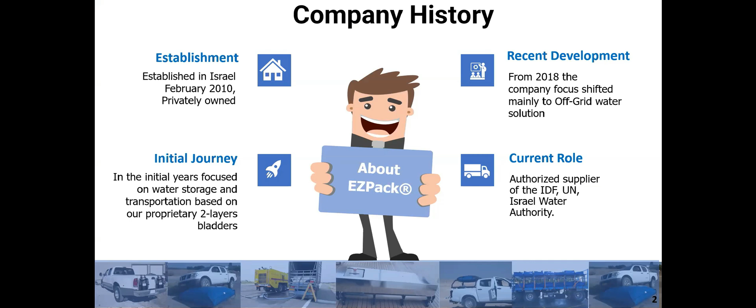And then in the last years, we are focusing on a solution for off-grid clean water for drinking and for agriculture, especially in light of the major water problems there are all around the world. We are also a supplier of the United Nations, Israel Defense Forces, Israel Water Authorities, and we have clients, of course, in Israel, and in the United States and several other countries.

So water is a huge issue. Currently, almost 800 million people all over the world, mainly in undeveloped countries, don't have even basic drinking water services. It's expected that in 2025, about 50% of the world population will be in areas that will be water stress areas.

Even in the United States, when we're speaking of the West Coast, there is a huge issue of water for agriculture because of the drought that continues for years there. And last summer, they significantly cut the water allocation for farmers on the West Coast, and farms have been closed because of no water resources.

All our products are based on one major concept that we developed, which is a two-layer bladder. A bladder is a flexible water storage container used all over the world in many cases. The main problem with bladders, which are one layer, is that it's a one-time product. Once you finish using it, you can't clean it and restore it to drinking water regulation standards. So you have to throw it away and use a new one, and that's of course a cost issue.

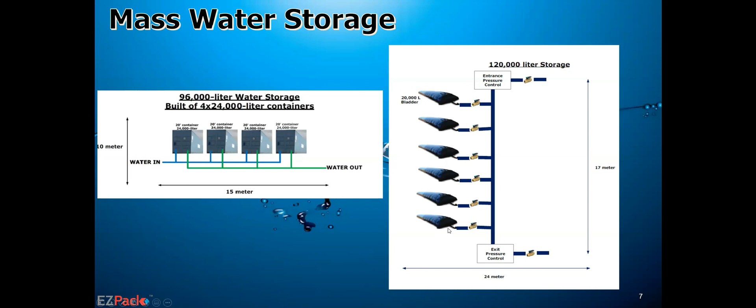Or if there is a problem, again, you deal with the bladder that is in a problem, and the rest of the storage is working. We have several very unique water transportation solutions, basically to replace tankers. The problem with a tanker is it's very expensive equipment, several hundreds of thousands of dollars, and usually people buy it for average use. The problem is when you have a peak need for transporting large amounts of water, of course you don't have enough tankers, and we came up with a solution to this.

What you see here is a solution we call the Spider, which is a mobile water unit. Basically it can be fitted on any vehicle. We just need to know the dimensions and the weight limitation of the vehicle, and we design the Spider according to it. You can see here some examples. This is a standard trailer of the US military with an 800-liter Spider. This is a military truck with a 2,000-liter Spider, and this is a standard pickup with a 500-liter Spider.

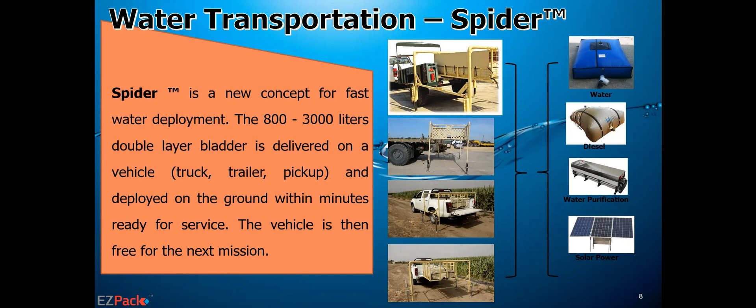We can put water storage on the Spider, of course. We can put diesel and have the Spider be a mobile diesel station, and we can put our water purification system, which I'll talk about in a minute, with solar power and provide a mobile water purification unit.

For large water transportation, as a replacement for tankers, we have two solutions. The idea is basically to use equipment that is available everywhere. In this solution, which is the HipoKit, we are using a standard flatbed truck. It can be a 4-meter truck, it can be an 18-wheeler. We built a kit that you put on the flatbed truck in a very short time, and you have a tanker at a fraction of the cost of a regular tanker. And when you finish using it, you can disassemble it, and the truck can be used for other uses.

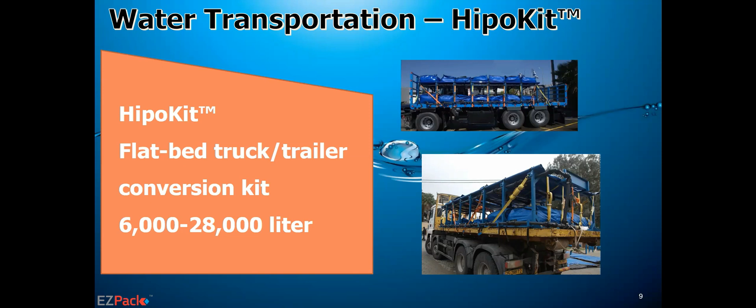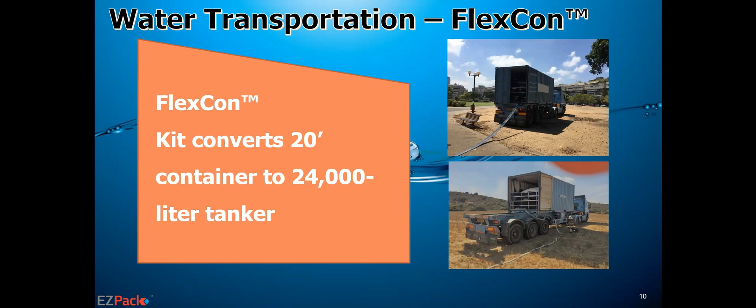The numbers are: a 4-meter truck can take 6,000 liters. An 18-wheeler can take 28,000 liters, and in between depends on the size of the truck or the trailer. And then we have another solution based on a standard 20-foot container, where again, we put the kit inside the container without making any changes to the container itself. So you can rent a container, use it with the kit whenever you need, and then disassemble the kit and reuse the container for other things. Such a container can take 24,000 liters.

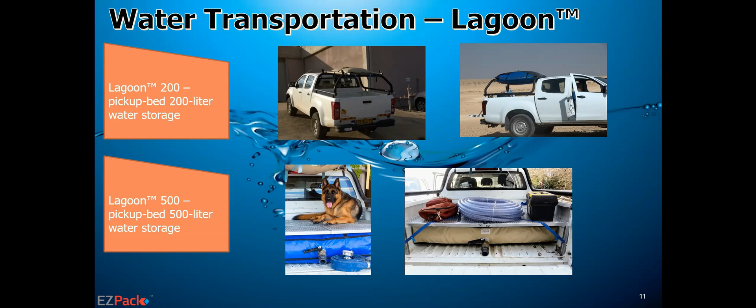And then we have some solutions for what we call tactical vehicles, mainly pickups, that can take water storage for rangers, first responders, and those kinds of things. Potential use cases for this equipment are, first of all, refugee camps. In refugee camps there is always a water problem, and we can provide a very fast water distribution solution to a very large refugee camp.

Of course, disasters: every time there is a disaster, and it doesn't matter if it's a flood, hurricane, tsunami, or tornado, the first thing that needs to be taken care of is the water utility, the water system. Even if the water system is working, usually the water is contaminated and needs to be treated, and people can't live a long time without water, contrary to food. So water needs to be supplied very quickly, and we provide those solutions.

And then, of course, we have the militaries, where again, for deployment and those kinds of things, we can provide very good solutions. And in the last year, in light of the major issue of wildfires around the world, we have also developed solutions for what we call pushing water to firefighters, because fire trucks have a limited amount of water storage. So we provide water forward to the fire line, so the fire trucks don't have to travel a long distance in order to be filled. And we also have a solution for refilling firefighting helicopters on the fire site. So that's the first part of our products, which are water distribution, transportation, and storage systems for various situations.

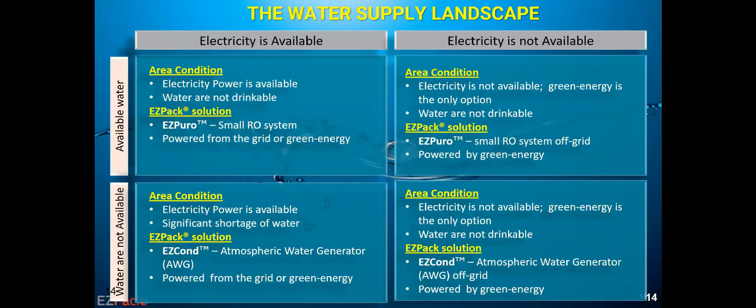So our treatment system is based on reverse osmosis, a very well accepted technology, which can do purification and desalination. We can purify water from wells that are contaminated, rivers that are contaminated, or we can desalinate brackish water and even seawater.

The most important thing about our products is that they are aimed for local solutions. So they are compact, they're small, they are easy to install, and don't require a lot of energy. So the solar system that supports them is relatively small.

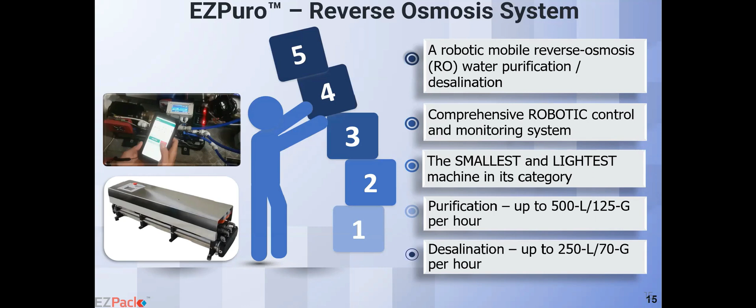Our EZPuro reverse osmosis system is a fully robotic system, doesn't need any technical knowledge to operate it, and it's the smallest and the lightest machine in the category. Just to understand the numbers, the system that you can see in the picture is about 120 centimeters by 40 by 40 and weighs less than 30 kilos.

And then the other solution that we are providing is producing water out of the air by condensation. The air is a huge water source, unutilized till now. And the idea behind our system is to overcome one of the biggest problems of atmospheric water generators, which is that it's best to do the process at night because the humidity is higher and temperatures are lower. You need electricity to do it.

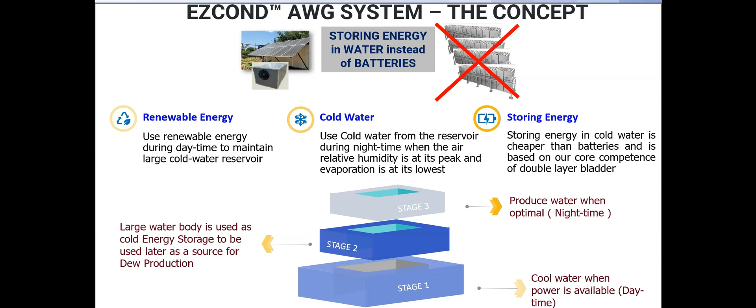So if you want to work off-grid, you need to store a lot of energy in batteries, and it becomes very expensive. We almost eliminate the need for batteries because we developed a concept of storing energy in water. During the day when the solar is available, we're using the solar energy to cool the water as much as we can. And then during the night, we circulate the water through our condensation unit and produce the water.

This system enables us, again, to provide a system that can be off-grid with a relatively smaller solar field and almost no need for batteries, so the cost is significantly lower. Of course, the amount of water that can be produced very much depends on the local conditions. The higher the humidity, the better the performance of the system. But even in areas of 50% humidity, water can be produced.

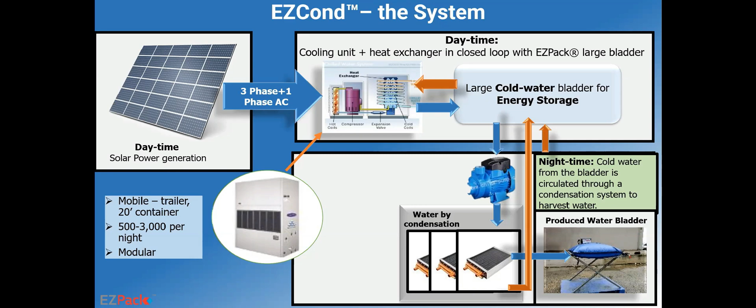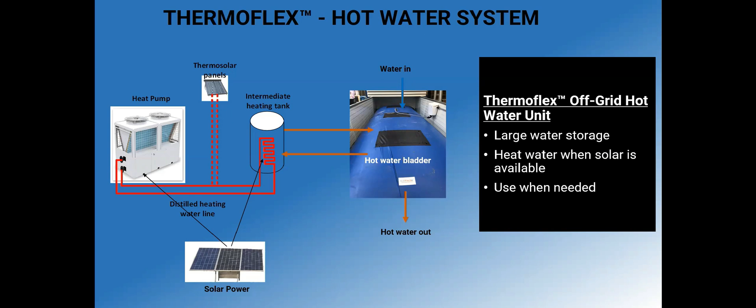And then we have another product that is based on off-grid systems or solar energy, a hot water unit. Again, we use solar energy to heat the water during the day when energy is available, store it in a large water reservoir, and then have enough hot water to be used all over the 24 hours of the day. The next day, we compensate for the decrease in temperature by the solar energy we provide.

Three use cases for such a system. The first one is an off-grid hurricane compatible house. We're working with a company from Florida that developed such a house, and we are providing them with a water system, which basically has three parts. One is the water storage, which you can see here, which has drinking water, hot water, the thermoflex, and the gray water. We have the water heat pump unit, and we have the EZPuro.

The water for the house is brought by collecting the rain, purifying it, running the water through the EZPuro, and then supplying it for drinking water and for hot water. The gray water is supplied by the residual water that is produced in the process of purifying the water, and it is used for flushing the toilets.

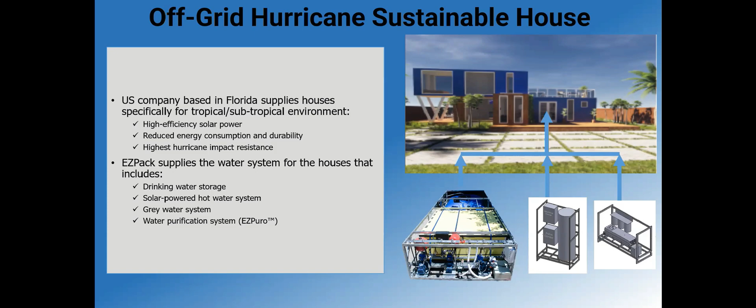Another solution is to equip villages or communities in rural areas with water running to the houses. Usually such villages have one water source. It can be a well with good water quality, so then we only provide the storage and the distribution. Or it can be a river or a well with brackish water, and then we can put a purification system in order to treat the water, or even put an atmospheric water generator to produce water.

We put a central water storage in the village, and then distribute the water to each family, and put a small 200-liter water storage for the family to supply them the needs of the day. During the next day, those bladders are refilled.

And the last solution is for agriculture, mainly for small to medium agriculture that uses irrigation. Again, it depends on the water source. Either it needs to be treated, or we can use the condensation unit. We put the water into bladders that are located on stages, and then the drip irrigation works by gravity. So the only energy we need is for the pump to deliver the water from the water source to the bladders, and that's done by a pump working on solar. And every day we refill the bladders in order to have enough water for a long day of irrigation.

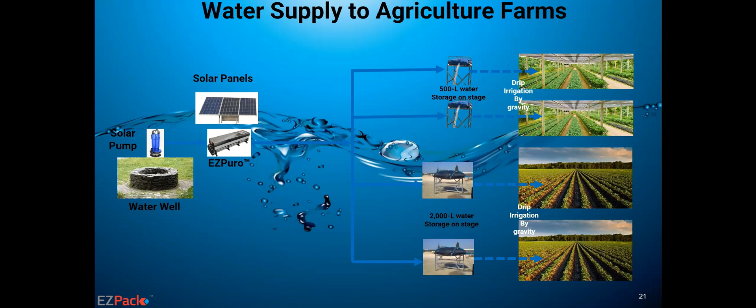So that's in a nutshell what we are doing. I hope I didn't go over my 20 minutes. And now, if you have any questions or any clarifications, please let me know.

Awesome, Alex. Thank you very much for this very complete presentation. Indeed, we have a couple of questions, especially one on pricing, on what the cost will come out to on a per liter basis, depending on the different solutions that you're providing.

Okay, so bladder cost, of course, depends on the bladder size, but it runs from around $100 for the small bladders up to the area of $4,000 to $5,000 for bladders of 20 or 24,000 liters.

The water transportation equipment is based on the size, in the magnitude of several $1,000s. The highest price, for an 18-wheeler, I think it's about $20,000. And of course, if you compare it to the price of a tanker, it's less than 10% of the price of a tanker.